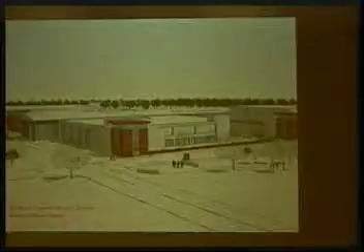And now we'll move on to Bensalem Township School District, which is a renovation project. The high school's existing building was constructed in 1969 with minimal upgrades during its lifetime. The high school was ultimately a renovation project, and the intent of the project was to fully modernize the building to include renovations as required to create 4 academies.

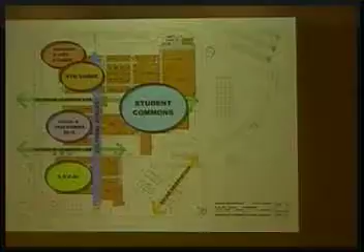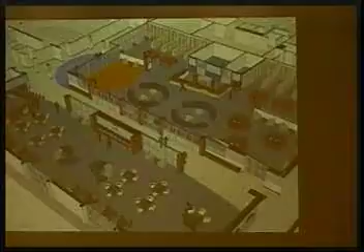Here's a different viewpoint of the media center in the upper right, and down here is the internet cafe. They're both kind of connected. The internet cafe features no doors, allowing for easy and free movement for the students. It's an open floor plan, so students can see what's going on around them and are aware of their total environment. There's visibility between spaces and through spaces with glass walls or no walls at all, and there's no isolation.

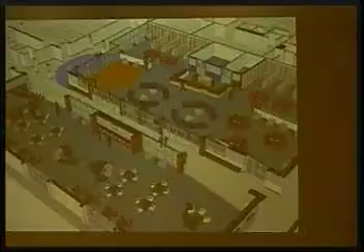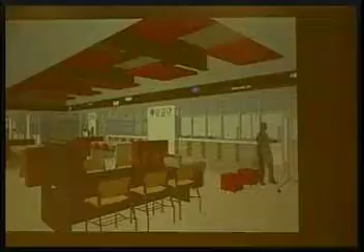Here's a look at the concept for the Business Commons, or Business and International Studies Academy. Through the design process, Bensalem came up with this idea to add one of these academies and wanted to incorporate this component into their educational programming. It was really an idea that came from them. This space is acoustically treated, and it includes glass to maintain that open feel, and a stock market ticker that gives students an opportunity to feel like they're in a true business atmosphere. It prepares them for real world experiences, not just your typical high school environment.

Now we'll take a look at Wilson School District. This district had a long history of supporting an extensive aquatics program. The existing 50-year-old facility was well maintained, however extensive renovations and upgrades were needed to meet newer codes and a range of program elements and activities. New construction was not an option due to existing site restraints, so the facility needed to be expanded internally.

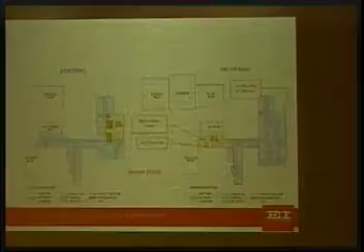So relocating the current media center, which is here, and pulling it to this side. What that's doing is moving all of your public spaces to one side of the building, consolidating that. It also allows the media center to overlook the cafe space, so you have glass that could overlook that space, again with clerestory lighting and the intercommunicating stair coming in off of that. That gives you additional classroom space along this side, as well as a core space where you could have glass STEM programs. You're still dividing your areas here by class and grade.

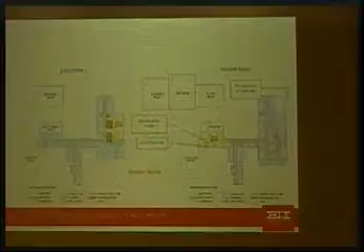Going back to the first floor, you can expand your athletic program where you have the gym that could seat 1,400 with possibly an elevated track. You have the Natatorium here, 8-lane, with diving and an adjustable bulkhead. You can seat 500, and again tie that in at the second level there.

Excuse me, getting over a cold.

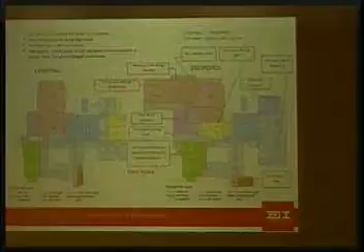Expanding the music program and arts program here with an addition, as well as off of the auditorium, this new entrance with an addition with glass that would allow for circulation into the side of the auditorium. Adjusting your support spaces for the auditorium along the side so that you have direct access to the stage, and then rebuilding the administration in this section as an addition.

So here you have it existing, and here you're jutting this out, so you have a new face to the school. It's a brand new administration area, and then you come into your ag program. Your CTE we'd be able to expand around the side, so now we're expanding that program here.

Again, picking up classroom spaces, and then a new STEM core that you could have here, and we could add additions here at the front as classrooms as needed.

Again, this would actually give you potentially 274,000 square feet for your 1,200 students. In fact, this would be larger and additional square footage than what you would have if you built new. So you're utilizing a lot of the infrastructure that's already there. You don't need to replace the foundations, the slabs, all the walls, the roof structure. You just replaced all of the windows in this building. The square footage here, with the additions and complete renovations, and the reconfiguration is really the key—you're creating a whole new look for the school internally, as well as the entry along the face, and your athletic program here that comes out with a separate entrance.

Just a lot of benefits there to consider. This would give you roughly around $41.8 million. You're saving roughly $11.5 million over new construction. And you actually have even more opportunities to save money depending on your scope.

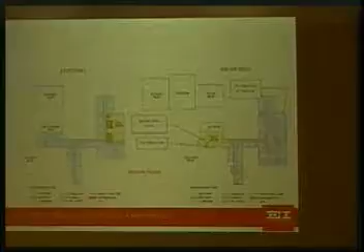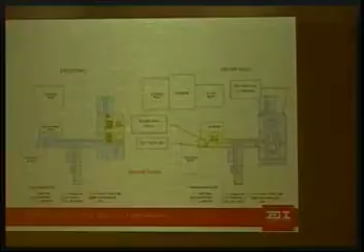Yes, so again, this is the second floor in the reconfiguration. And again, just connecting this media center overlooking the cafe with glass, clerestory lighting, and intercommunicating stair to below in the courtyard. Just a completely different feel of how the school really feels inside.

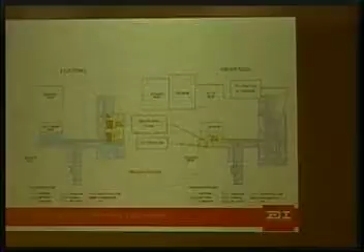This is option 2, to renovate the intermediate center as an intermediate center. Okay, so we have several options to go through here. But again, if you're keeping the high school with the football stadium and track, and making those additions, doing complete renovations, what does that mean for the intermediate center? We have a few options. One is renovation, and we have another later which is new to replace this facility.

So in this case, again, it's a complete renovation and additions. Your addition here would be about a 4,000 square foot addition in the front for the administration. Here's the existing up in the upper left, and the proposed down here. As you're walking in the existing now, you can see your administration is separated, across the hall. When you come in, it's dark.

It's a blank wall. They tried to renovate this previously, but it wasn't really the proper solution, so here you consolidate your administration area back to really where it wants to be. You're recreating a new secure entrance, and now with a new canopy, again, a new face to the school. So as you come in, instead of looking at a blank wall, now you're looking at this curved glass entry into the media center, which is currently back here.

Can everyone see the laser pointer okay with this? Okay.

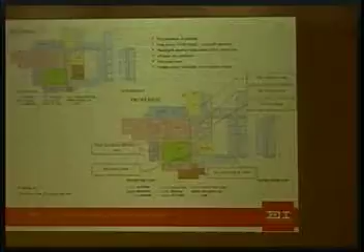Keep in mind, with both of these renovation options, you're also increasing your PlanCon reimbursement by 10% over what you would get for new construction. New construction, you don't get that extra 10%. With renovation work, you do get an additional 10% of PlanCon reimbursement.

So in this option, you're looking at about 132,000 square feet, roughly 17.9 million, and you're saving about 13 million over building a new intermediate center, over new construction. Again, you're using all of that infrastructure and space, and you're also giving students an opportunity to participate and observe that renovation project and the technology that goes into it while they're in school.

Here then, option 3, we're looking at renovating the high school as an intermediate center, okay? This ties in with a new high school concept, which we'll go over in a minute.

So in this case, this is a fairly complex and difficult problem, because at first glance you say that sounds like it would work. You walk through some of the spaces, but then you look at the square footage of the facility. This facility is between 210 and 230,000 square feet, depending on whether we're counting the basement area. I know there's some discrepancy in the square footage, but it's a significant facility.

If you look at what you really need for your intermediate center, you're at about 128,000 square feet for your program, for your occupancy. So if you look at what this building can currently house, according to PDE, you can serve about 1,336 students with this facility. With your grades 7 to 8, as an example, you have 577 students. Or even if you shifted 6th grade into this facility, you're bumping up your occupancy to about 877 students.

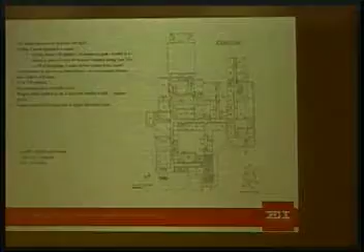And then keep in mind, now the football stadium and track is at the middle school. So potentially you have a security issue there as well, because now you have students coming from, potentially, a new high school across the street. Now they're coming over into the intermediate center, where you have strangers essentially on the campus. You don't really know, are they supposed to be there for the intermediate center? Are they really part of the high school program? What are they doing around there? That's something to consider, just the crossover of that with the locker rooms and restrooms.

I know you talked about doing a tunnel or a bridge to make a connection. Again, very complex, costly, and those projects can take potentially years to complete, if they are ever completed, just because of the Department of Environmental Protection and your PennDOT approvals. Again, very costly. I've actually ripped down more bridges over roads because they're just ineffective. It's just something that's very costly to consider.

And your programs, even your ag and CTE programs, again very large for what you would expect at the intermediate center. And then, of course, now you wouldn't have that swimming pool at the middle school anymore, which was originally part of that program. That's kind of embedded into your program now.

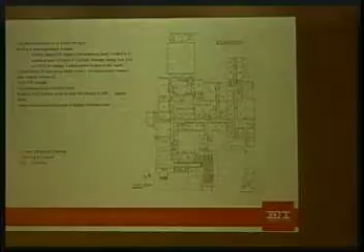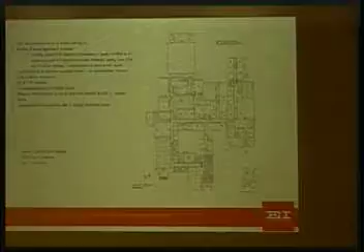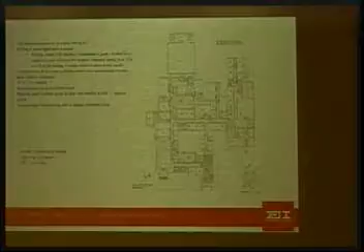If you look at the cost we're using for the renovation of this as a high school, again, $10 million really isn't going to get you much. I think you might be potentially disappointed in trying to repurpose such a huge facility as an intermediate center, for what could potentially be a very low budget. And again, is that really the right place? Is there an opportunity to save money in some of these other options? Again, just something for your consideration.

Here, option 4. We're looking at building a new high school on the intermediate site.

Here's the floor plan of the existing building that would be torn down. Roughly, you're spending about $1 million to tear that facility down, so that's $1 million you can't put into your facility.

Here we're showing a new proposed high school where your grades might jut out over the community park, at the main intersection, the face to the community, really what they can see. So we're projecting this down over that bank, making a statement to the community.

As you come in to the main entrance, through the glass, there's glass to your cafe, then that really looks straight out through the back. What's unique is you come into the facility and you're looking out right through it. You have the media center, which is directly adjacent to the cafe, your administration here in the front, and then your kitchen, your services.

Back here will be your ag CTE. You have your auditorium in the back, your gym and your pools with direct field access. Your parking here is potentially reduced because you have a stormwater issue on this site.

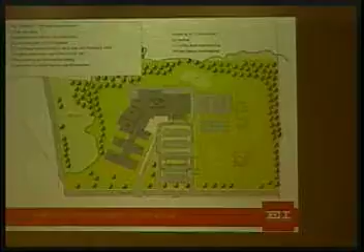In this scenario, you're looking at about 250,000 square feet for around 1,200 students, around $53.3 million. Again, you're about $11.5 million over more than renovating, and you're getting 10% less PlanCon reimbursement with this option.

The football field and the stadium are now no longer associated with the high school. You have a connection you're trying to accomplish across the road, which is extremely costly and time-consuming; permitting for that could be years in the process. And really, is that the right place for the stadium with such a proud football program, having just sent someone to the Green Bay Packers?

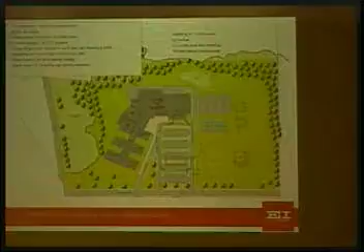Moving along to option 5, just another scenario. Again, we're trying to cover a lot of bases for you, showing the various options: to build a new intermediate on the intermediate site. So this is new construction; we're tearing down the existing building, which costs about $1 million to do.

Here's your field access, your basin again. Now you have more space for parking because it's a smaller footprint. If you have 7th and 8th grade, you need about 100,000 square feet, around $25 million.

If you're looking to move grades 6 to 8 to this facility, you could look at possibly 130,000 square feet, so now you're up around $30.9 million. Again, much more costly than what we could accomplish through the renovation scope, while still really giving you a brand new school with all new components in that facility. You're really just keeping the infrastructure there.

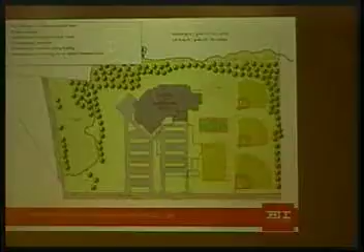So what might be our recommendation in this case? Again, trying to reduce cost and tax burden while still providing you with state-of-the-art facilities. You've seen those before and after pictures, and you know what we can accomplish.

That's a big part of it. The reconfiguration is also critical as part of the design and providing you with a superior facility. It's not going to look anything like you currently have. So with options 1 and 2, to renovate, you have the ability to further reduce that scope and cost by limiting renovation depending on the needs of that space. We would literally go through and look to reduce that. Renovations can also be great learning experiences for the kids — they're in that environment, they see the technology, and it's just something important to consider.

So moving along to just some vision, some images to give you an idea.

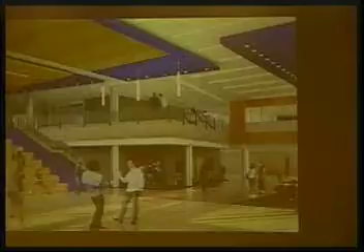Here you have step block seating, which is over here into the circulation, which is great collaborative space. Gives you a lot of options, windows into the space, light.

Again, some really high spaces with glass, ceilings that step down and accent. Borrowed light into the center core here, so you get a lot of natural light in there. You have balcony spaces that connect all of that.

A light monitor in this case, some balcony spaces, glass walls in the corridors, and views out at the end of the building where you have views out at the back.

And then here you're looking at flexible collaborative space again, where you might have wall marker boards, monitors that might be for news or events, technology charging ports, accent walls, mixed seating.

And then here you have expandable large group spaces where you might have sliding walls. It gives you flexibility. You're stepping these potentially in tiers. Open access, cloud ceiling treatments, flexibility in that space.

And again, you're looking at flexible seating, technology, integrating some high ceiling spaces and wall monitors, lights.

And so we're looking at really trying to manage cost, taking the vision, working together, using our experience, and developing a great school for the students of Dover. And really that's what it's all about, and that's our passion.

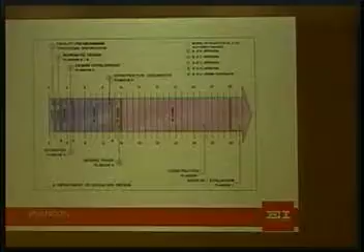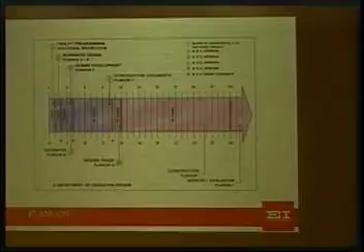Example of a project schedule, and I think you're familiar with PlanCon as you just finished this project in 2012. As you can see here, we talked about schematic and design development, construction drawings. That process normally takes from 9 to 12 months to get through PlanCon, and then we have our construction time. I think your project could take longer than that, and this strictly is based on PlanCon and not the fact that we could have community meetings because we want their input. So that's something we have to work on together.

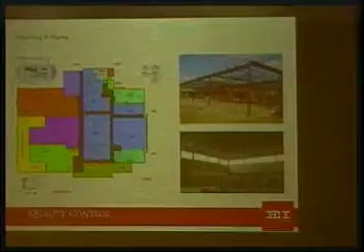As far as change orders, we can do all the quality control we want. Some of the items we talked about, unfortunately change orders still do happen. However, when they do, we'll address them.

If it's architectural under the general construction, EI will look at that. First of all, we'll determine is that a justifiable change order? Is it something that's already in the spec? In which case, it'll be rejected. If not, we will review it for material cost, quantity, and price. And if we think it's reasonable, at that point we would bring it to the district.

Likewise, if it was mechanical, electrical, and plumbing, Jeff in his office with Gatter and Deal will do the same research and investigation on that. We have found that if we follow the items that I have outlined, usually our change orders end up approximately 1.8% at the end of the job.

As always with every job, the owner does make changes as we proceed through construction. And when we add the owner's change orders, we end up being around 6%.

Additionally, at the end of the job, we're not done. We will come back before the end of the first year. We'll walk the project with you. We'll look at the operation, the maintenance, and see if there's anything that we can further come back and take care of, if there are warranty items.